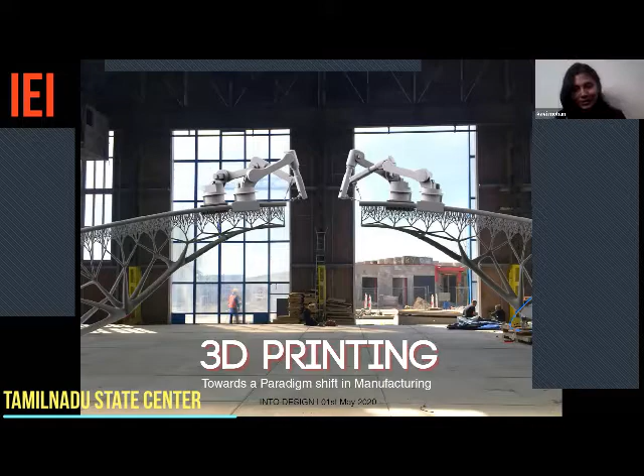As sir said, today we're going to have a look at 3D printing and how it is going to make a big impact towards our industries and our daily life as well. Happy May Day as well. I'll start the presentation right now. You all can hear me all right, right?

I'm a computational designer and also a 3D printing specialist. The whole 3D printing came to me 8 years back when I was doing my master's in architecture in Germany. I was handling a lot of printers there, in the Fab Lab, the fabrication lab, and that's the first time I encountered 3D printing. 3D printers those days were very huge, but now they've become much smaller and much more efficient to use. It's come a long way already.

I'm going to take you through 3D printing and the varied opportunities that we have inside as well. I'm also a trainer with a particular 3D software called Rhino 3D, a very efficient curve modeling software used among most industries now. I'm also an ambassador for a group called Women in 3D Printing, an international community that aims at promoting 3D printing in terms of entrepreneurship and communities around the world.

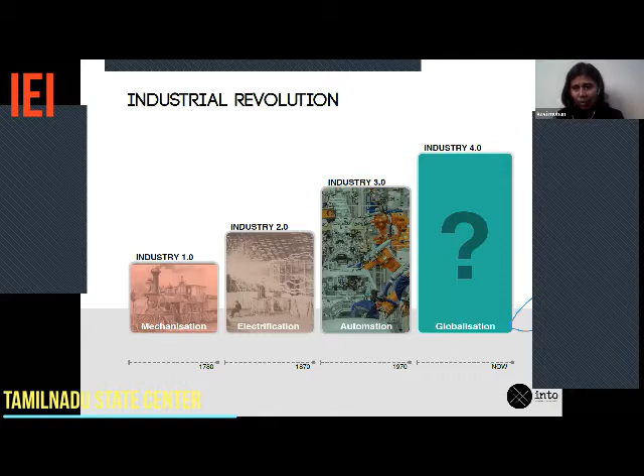When it comes to 3D printing, the technical term is actually additive manufacturing. I'm not sure how many of you have heard about it or not, so I'm going to give a little elaboration of what additive manufacturing is about. It's as simple as clay modeling. When we start off clay modeling, there is a particular technique called clay coiling. Coiling is nothing but rolling it into a thin strip and then placing it layer by layer by layer. That is called coiling, and it's a very good technique for clay modeling.

Now, 3D printing is a very similar process. It does layer by layer by layer. This is called additive manufacturing. Now, most of our traditional manufacturing is all subtractive manufacturing. You basically keep a particular material and you sculpt out of it. That is subtractive manufacturing. So firstly, when I'm talking about this, you already understand that there is much less wastage in additive manufacturing.

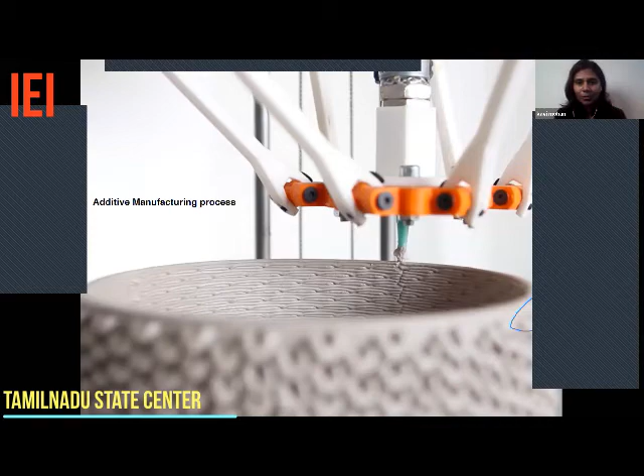It takes a little bit of time these days, but 7 years back when I started, a particular model, if it took 24 hours, today it takes around 3 hours. So that is the kind of efficiency we are getting with technology. And there will be no time—we'll probably get a model in say 15 minutes or 20 minutes as well.

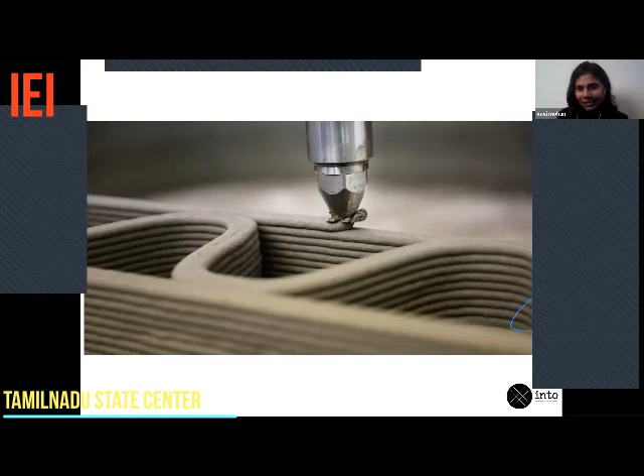So this is again a concrete printer, an image of it. You can see that every single level is printed, and then it gives you one particular entity.

So just to run through printing history, for me it has only been 7 years, but it's been running ever since 1985. Probably the reason now you're seeing it boom is in the last 3 years, but then in 2000... You would see a printer running. But the whole idea why it didn't really boom in the industry was because it was patented by many companies, say Stratasys, and again Charles Hull also patented it.

One of the first 3D printing companies set up in Asia was also in Chennai. EOS set up probably 15 years back, right? So that is also there.

In 1989, the technology that you would have mostly seen, called a desktop printer, was patented. That is called FDM technology. And in 1990, CAD tools came up.

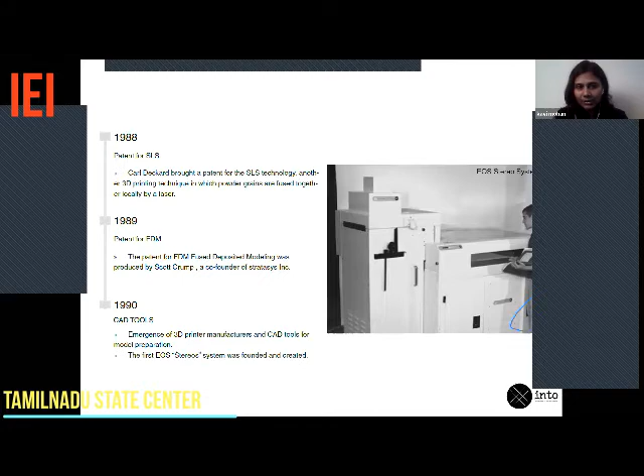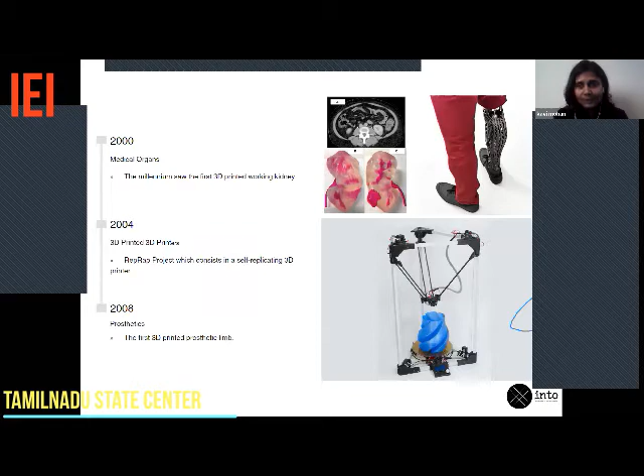When it comes to the health industry, you'll notice it's one of the few that embraces technology much higher. So you'd see medical organs starting to research quite a bit on prosthetics. This is back in 2000, almost 20 years back, and in 2008, prosthetics started developing.

This particular Urbee is one of the first prototyped cars, in 2010. It took 5 years for them to 3D print 75% of an end user car. I'll show that image as well in a few minutes.

In 2014, there was a big boom in the industry because of the expiry of a particular patent, particularly of FDM technology. That is your desktop printer that you would have seen in your universities or around in most labs.

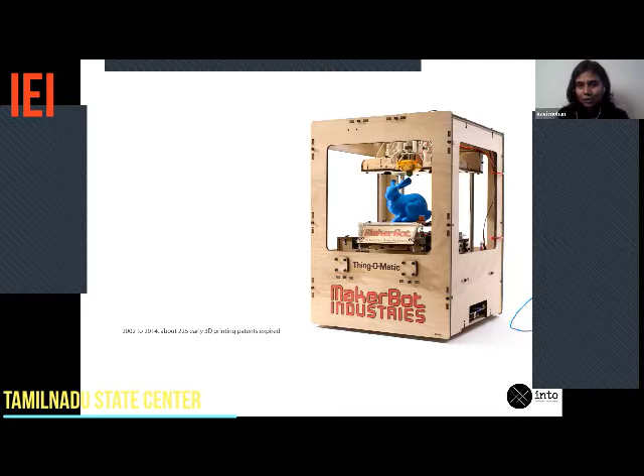NASA does most interesting work, and not just NASA, even our ISRO has quite a bit of 3D printers available. What they've been trying to do is, in space, it is much better if you take a printer and start printing food, start printing houses. So they've been embracing this technology quite a bit.

In the future, there's something I'd like to share. What most people think is it's just like a Xerox machine. Some 10, 15 years back, Xerox machines were very famous—you used to go pay some money and take copies. Similarly, what happens now is those Xerox machines are there in your house. There will be a similar transition.

3D printers now are available in labs. Probably in the future, they'll be available in your house. I actually have one in my house right now. So 3D printers are quite accessible, quite user-friendly to use as well, and you have the power of manufacturing in your hand. That will be very close to you in the future as well.

3D printing will revolutionize the way you think, the way you realize, the way you produce. Say, for example, you want to buy a dress—you might even download a particular model and 3D print it at your home. So these are possibilities in the future that will definitely take place.

Coming to industries, I'm noticing there are a lot of different types of engineers here, so I'm just going to broadly show you some of the industries. Automotive industry is something—most of my clients are from the automotive industry.

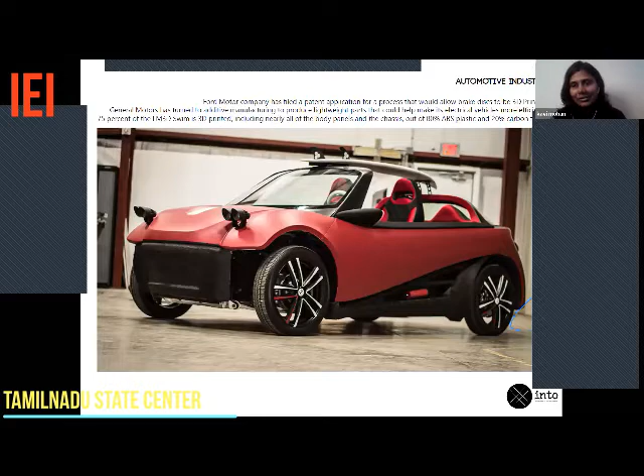We've been working with them for design for manufacturing, for 3D printing. We work with Hyundai, Ather—everybody is actually embracing quite a bit of 3D printing into their research team as well, and also for end user products.

This particular car you see here is called the LM3D Swim, which has 75% 3D printed parts in the body, particularly the chassis. If you look at the material, it's 20% carbon fiber and 80% ABS plastic. This is one of my favorite projects as well.

Another thing is Ford Motor Company has also patented one particular idea of 3D printing a brake disc. This brake disc is not a prototype, it's an end user part—meaning they're going to start doing mass production of the brake disc.

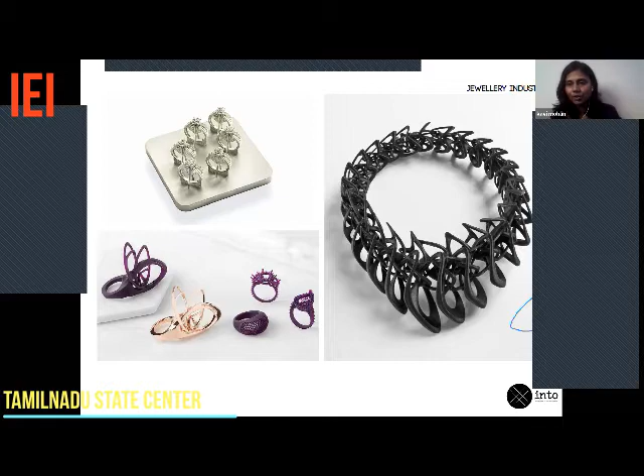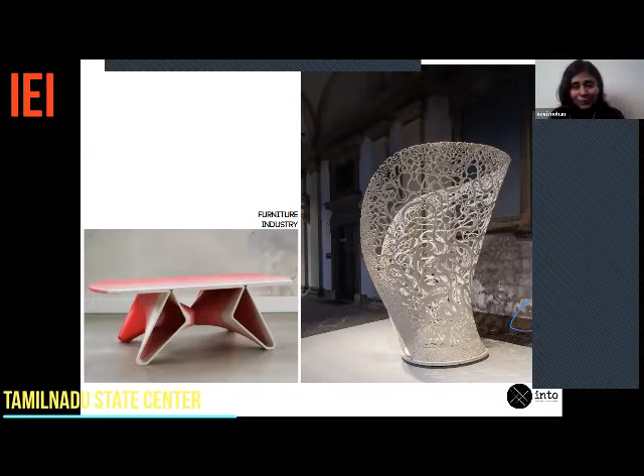The furniture industry — what happens with furniture? I majorly interact with the furniture industry as well. Now these are not at all prototypes, you can sit on them, you can use them in your daily life. Their lifetime is actually pretty good, and you can get delicate, complex designs as well. So the furniture industry has also embraced it really well.

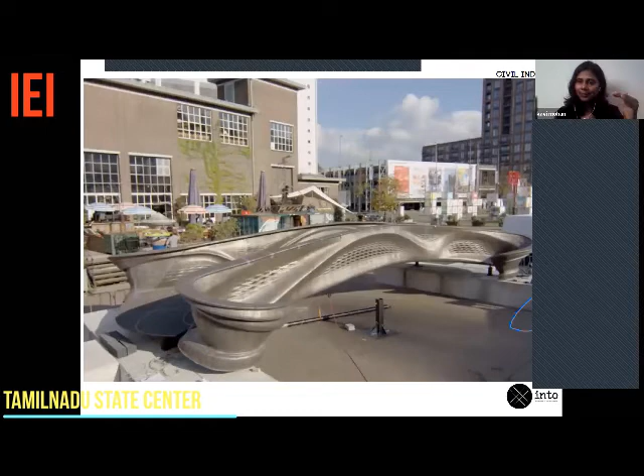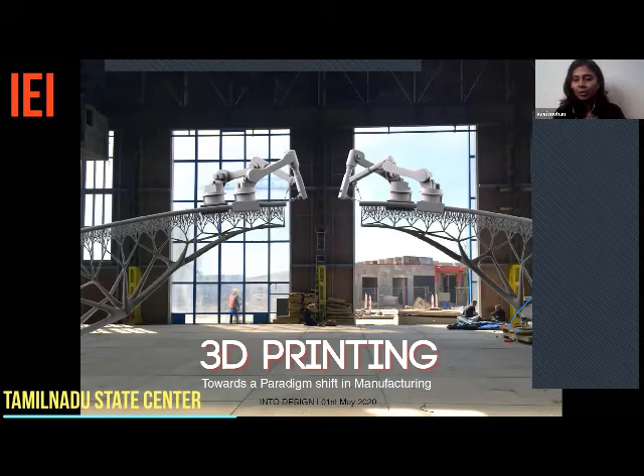Another one, this was in the news 2-3 years back: a steel 3D printed bridge done in Amsterdam. One thing is, Amsterdam, Netherlands, the entire country embraces 3D printing for one very important reason. They have a lot of small bridges on their canals and they hate to pollute the canal. So why they're using 3D printing — I'll show you the first image actually, this is another bridge from Netherlands — when you start printing, the robot sits right on the bridge itself, not underneath. Whenever you construct a bridge normally, you spoil and pollute the entire canal. So you can avoid that by 3D printing it one by one through an automated robot. That's another example in the civil industry.

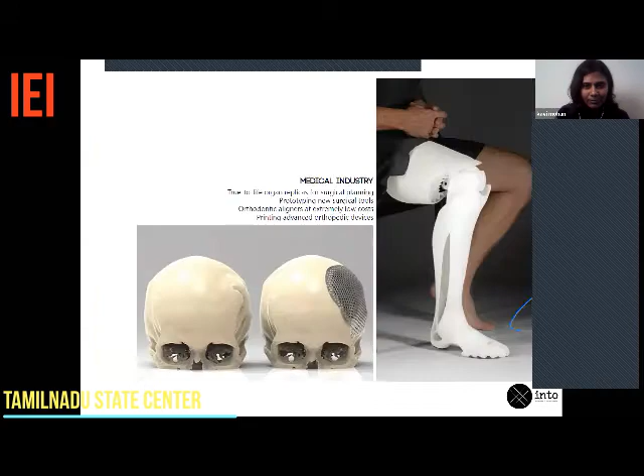Sorry, I'm just going back to the presentation. Yeah, so that's the 3D printed bridge.

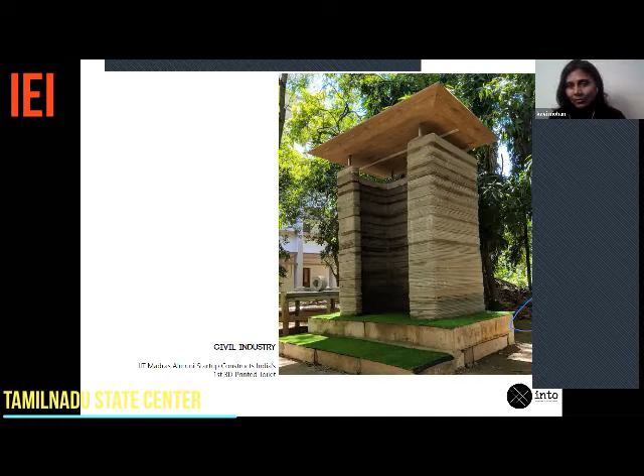Now this one, I don't know how many of you have seen this, but it's still there at IIT Madras campus. It was done by a few alumni, the group is called Tvasta. This is a 3D printed toilet, right in the center of the civil engineering department. You can also see the small texture there — it's nothing but concrete built layer by layer. It's a beautiful machine. If you walk in, they have the 3D printer also near the civil engineering department, so you can have a look at it. This is also the first 3D printed toilet in the world, a fully functional one.

And this is another office building in Dubai. What I'd like to show you is the elegance you can get in construction — with complexity in design and customization, the construction cost doesn't increase. It stays the same if you 3D print. So this is a classic example of complexity in design as well.

Again, I would like to say that it will definitely change the way you think, you realize, and you produce. Now, if you look at the impact on manufacturing,

If you look at the impact on manufacturing, there are two things. And I'm not going to say traditional manufacturing is bad, additive manufacturing is good. What we need to understand is where this is good and where this is good, and utilize the maximum potential of it.

Now, if you look at the overall ecosystem, to understand traditional manufacturing, you need raw materials. The raw materials come into a factory. You need a big factory to have multiple machinery for manufacturing, for assembly, and so on. You'll need a lot of labor for assembly, and distribution comes into placement as well.

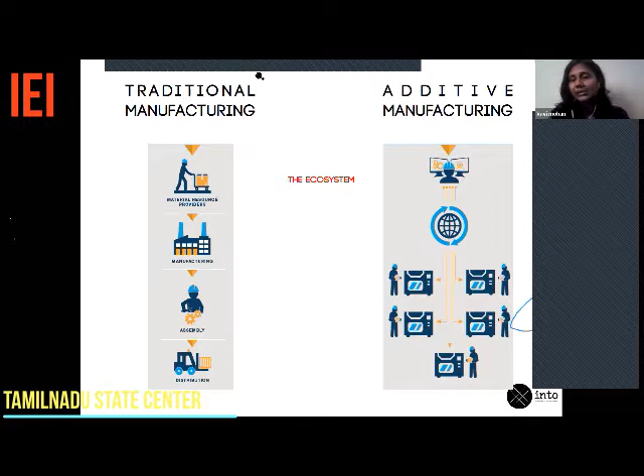But with additive manufacturing, when you start embracing it into the system, what I would like to show you is the right-hand side one. That is this person. So this person can sit anywhere in the world, design a particular product, or it could also be a CAD modeler who's developing a particular product. Probably he's in Spain and the 3D printing happens in India, or it can happen in Sri Lanka. So wherever - this is called localization or decentralization again, right? So that is also a possibility.

So what happens here is there is a lot of overheads that cuts down in terms of factory space and so on. A lot of environmental carbon footprint is reduced, and assembly as well. There's a good point about assembly, which I'll speak later, but this is generally the ecosystem that we can think of.

So these are all the different pros of using additive manufacturing. The first one is mass production. I know you will be surprised to think that I'm talking about mass production in 3D printing, but this is a possibility. I'll give you two examples.

One is something that's happening in New York. Another live example is what is happening during the COVID situation. We've been able to mass produce quite a bit of face shields, quite a bit of masks in the last 20 days. So I'll also now get you through that. Another one is mass customization, complex manufacturing, decentralized manufacturing. I'll speak about each of this and how it implies on 3D printing as well.

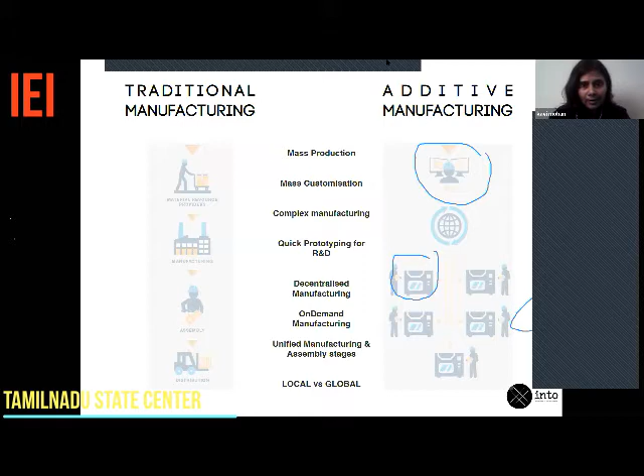So this is the example of mass production. There's a company called Voodoo Manufacturing Company, which is right in the city of New York. This is a space where they have almost 200 printers. They've actually multiplied it quite a bit - they have more than 200, 300 printers. And what happens is the same product can be printed in all these machines, and they can print up to 1 to 10,000 units in a day. So it depends on the size of the geometry as well.

So we cannot deny that mass production is not possible, but also, for example, sometimes injection molding can be really fast. It really depends on the particular object that we're talking about here. So there is a possibility of mass production.

But when it comes to 3D printing, mass customization is the key. There's a very interesting company - they started around 4 or 5 years back, called Normal Tech. This is a very simple solution. If most of you look at your headsets, most of you will get a little bit annoyed telling, no, this doesn't fit, Apple is better, another company is better.

But what Normal does is it allows you - on the right side you will see a picture of a girl. So this is the app they developed. In the app, what they will do is they will ask you to take 5 or 10 pictures, starting from this part, 1, 2, 3, and so on. So once you take them, it scans your ear, and it kind of gives you a solution that your ear shape is like this, and it will give you a perfect fit.

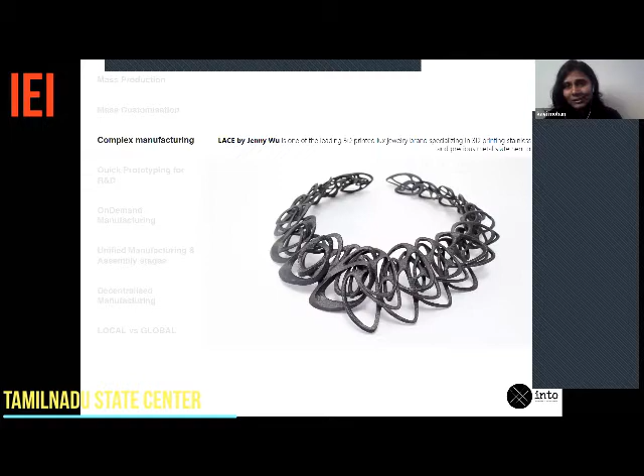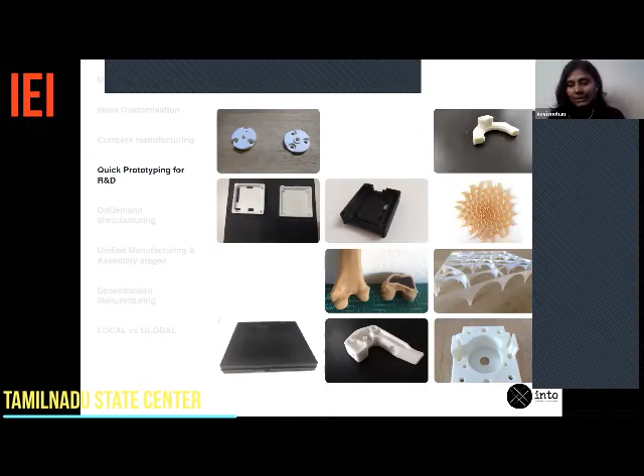When it comes to rapid prototyping, I think this is the most used right now. You want to see a product, you can immediately prototype and develop it. But say, for example, 4-5 years back, if you want to prototype, you have to wait at least 1 week minimum to see your object. So R&D, your research and development, slows down. Quick prototyping is a very added advantage in 3D printing.

Now this is one of the things I really like about 3D printing, which is called on-demand manufacturing. We have a sister company called High on Life, where a lot of designers work with us, and they design a particular product for 3D printing.

Now the next one is unified manufacturing and assembly stages. This is of great interest for most car companies, automobile companies as well. Renault has been putting in quite a bit of effort, where they had a lot of broken or assembled engine parts which they've combined together. I can't show the image here, but it's a classic example of how they want to unitize all the parts, like this for example.

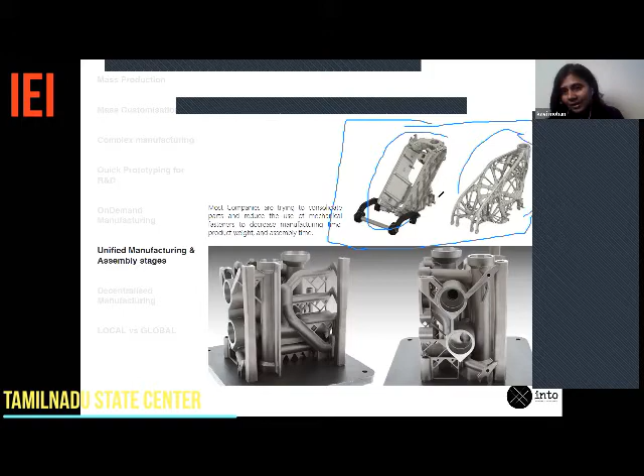You'll notice the first one is the before picture and the second one is the after picture. The after can be printed mostly with 3D printing because it is one unique member, with a lot of intricacy in terms of traditional manufacturing. So every process here, the manufacturing process is simplified and the assembly is also simplified, where say there are 50 parts, it is optimized into one part, and that optimized part can be 3D printed.

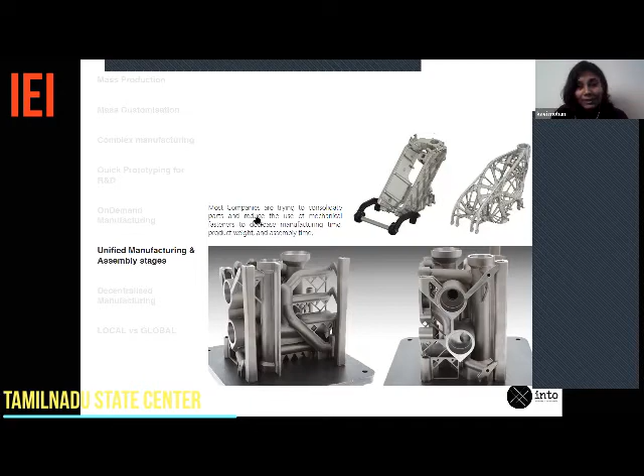The next one is decentralized manufacturing. I think most of you would have seen our police officials standing on the streets guarding us, wearing a face shield. There's a very interesting story, and a very live example close to my heart as well.

Because 20 days back, since I'm a part of the Women in 3D Printing community, I keep watching what's happening in Spain and other places. So one of my friends in Spain 3D printed a face shield and gave it to the nearby hospitals.

Looking at her, I also started printing, but I noticed I had only one printer in my house. So I contacted the rest of almost Tamil Nadu, we sent out a mail saying whoever is interested, please participate with us. In the end of 2 days, we had 200 participants, 100 people in WhatsApp who had access to 200 3D printers. So we started 3D printing a lot of face shields and giving them to our local areas.

Say I live in Adyar, so I gave it closer to the hospitals in Adyar. And these particular shields that you see police wearing are actually developed by IIT Madras. They have a lot of 3D printers inside as well, and they've been giving them to police people too.

Now this is a live example of how we are fighting, providing face shields without even any factory opening. The first 2-3 days it was super confusing, and we had no factory open at that time. So this is a classic example.

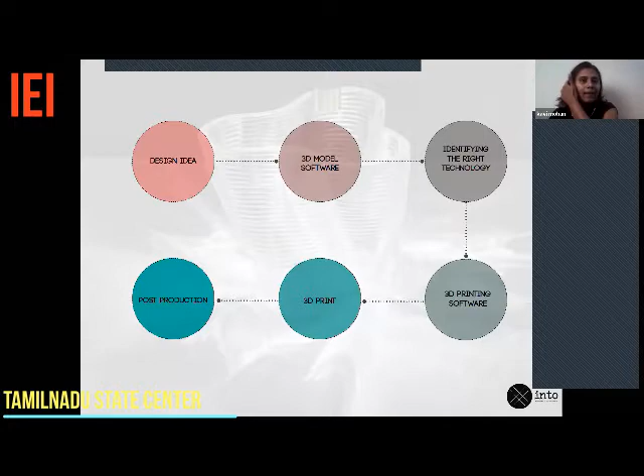You just need to do a lot of reading on what is the best technology for your business. There are quite a lot of different kinds of products and machines available: SLA, DLP, dual extrusion printers, multicolor printers by HP. Every day is a new innovation in the 3D printing industry.

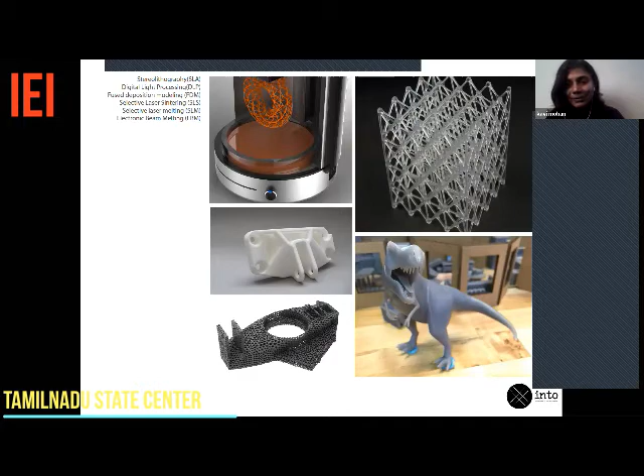If you miss one day, you'll be like, oh wow, they printed a car yesterday. Then the next day they say, oh, they printed a space rover. So you just have to keep updating yourself in this industry as well.

With Industry Revolution 4.0 coming up—I speak about Industry Revolution 4.0—it was actually a term first coined in Germany by Angela Merkel, the ex-minister at the time. But who reframed these things together was the World Economic Forum. That is also a good forum for us to follow and understand, particularly for business leaders, who will already know that Industry 4.0 is coming up, with a lot of emergence of new technologies, different processes, and completely different business models.

This is a very important thing for us, because what you see now, in 5 years, that particular job opening will be completely different.

So what I would like to end with is one of my favorite lines: It is not the strongest of the species that survives, not the most intelligent ones, but the ones that can adapt to change. That is probably what is very much required right now for our Industry Revolution 4.0 as well. Upskilling and adapting to change is the key for our healthy living as well. Thank you.